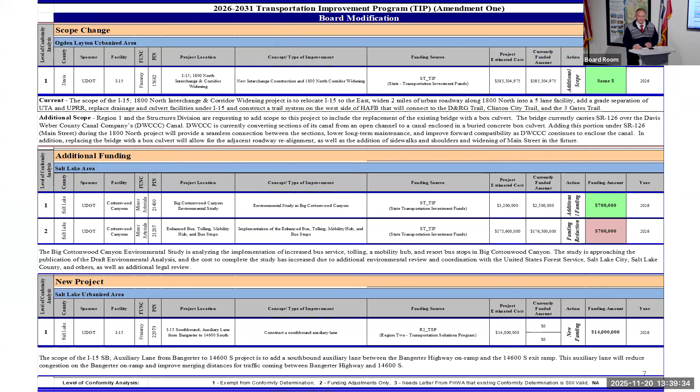This is an information item. Is there any questions on any of this material? There's no questions, Ben. Let's continue moving forward, if you would, please. Perfect, thank you.

So then we have the board mod before you today for your review and approval. There are two tables that identify six projects, and we'll go through those projects fairly quickly.

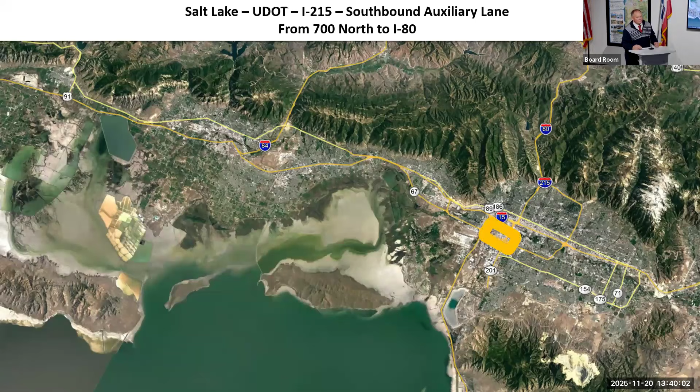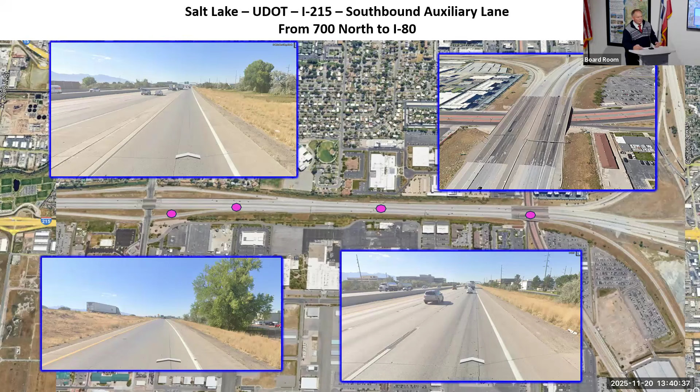The first project on that table is in Salt Lake County, on I-215. It's a request from UDOT to construct a southbound auxiliary lane from 700 North to I-80. Looking at the facility, there's 215, looking from the ramp in the first picture, then onto the main line, and moving along 215 until the ramp that exits west on I-80. The intent with the auxiliary lane is that it reduces conflict points, allowing more time for the merge.

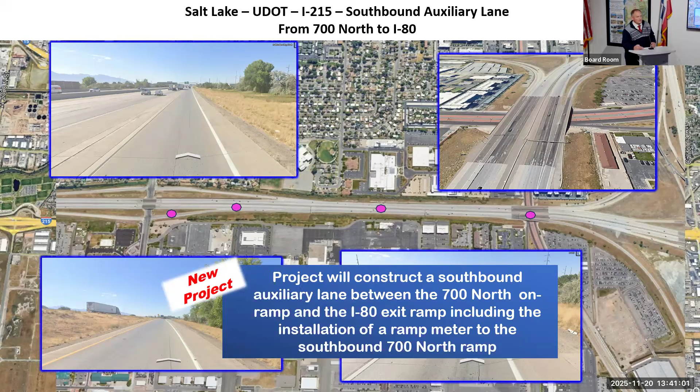There'll also be a ramp meter constructed on the ramp at 700 North. This will enable spacing, or gaps between traveling cars on I-215, to allow vehicles to enter onto I-215 from 700 North. This project is new. It's estimated to cost $9 million, funded with Transportation Solutions Program funds. That's the first project for this board mod.

Hey Ben, can I ask a question on that? It's a blessing for those of us who live in that area with the reconstruction. Will this be done in conjunction with that, or will it follow up afterwards? What do they think the timing is? I'm all for it, it'll improve my arrival at the airport by 5 minutes, so I'm excited.

So we're currently in the process of getting design completed on it. We're working with Federal Highways and looking at the possibility of including it into the existing project that is going on right now. We're still in talks on that. Right now the idea is this would be constructed next year, but we're hopeful we'd be able to do it with the project as it stands now. I don't have a definitive answer yet on that.

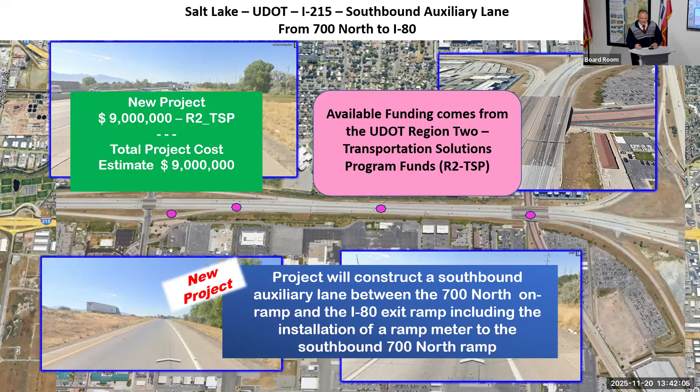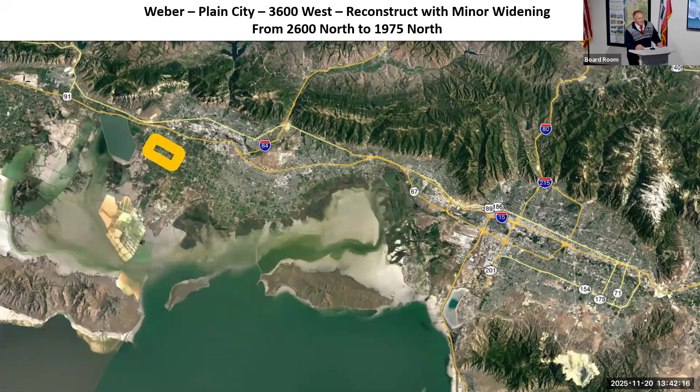Thank you, Kendall. So the next project we have to look at is up in Weber County. This is a request from Plain City, on 3600 West, between 2600 North and 1975 North. The intent is to reconstruct with minor widening, including drainage, curb, gutter, and sidewalks.

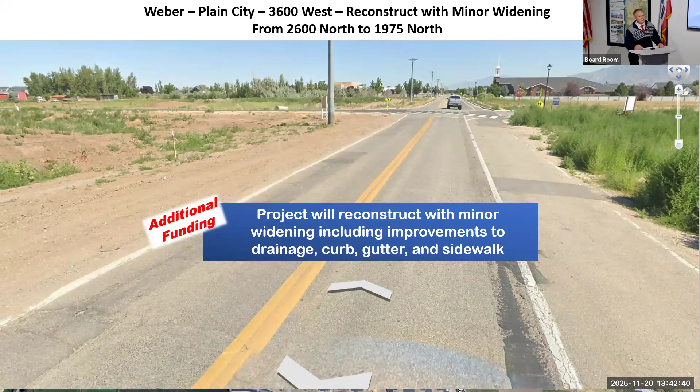This is the facility we reference quite a bit when we talk about the little school child riding along the side or shoulder of the traffic. This is an improved picture since that time. When Transcom reviewed this project and recommended funding to the regional council, it was estimated to cost about $3.1 million plus. The funds requested were $2.9 million.

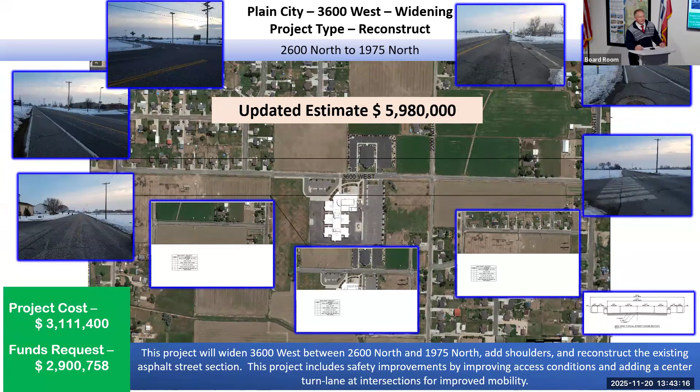Since then, as the project has moved through the design process, the updated estimated project cost is now $5.9+ million. With that increase, the city went to Weber County, because part of the increase was due to right-of-way, and through the WACOG process was able to secure an additional $1.9+ million.

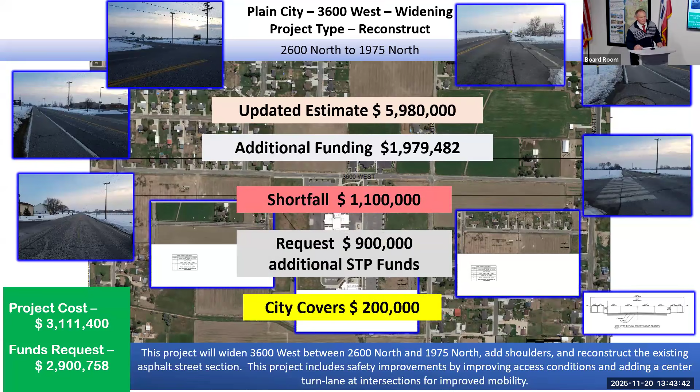That still left us about a $1.1 million shortfall. The request from Plain City is for an additional $900,000 in STP funds, and the city commits to bring the remaining $200,000. This would be the second of the board modifications before you.

The third project is in Davis County, on the West Davis Highway. Can you go back one slide, please? Thank you.

The next project is in Davis County, on the West Davis Highway, or SR 177. Many of you have hopefully had the opportunity to drive on this facility, from where Legacy Highway concludes up to SR 193. The intent of this board modification is to request additional funding for construction of the segment between 193 and 1800 North.

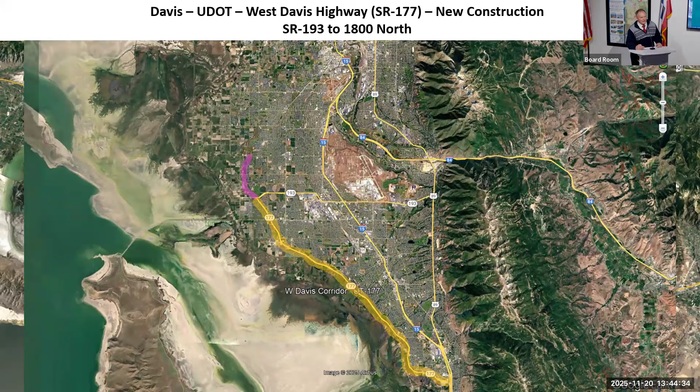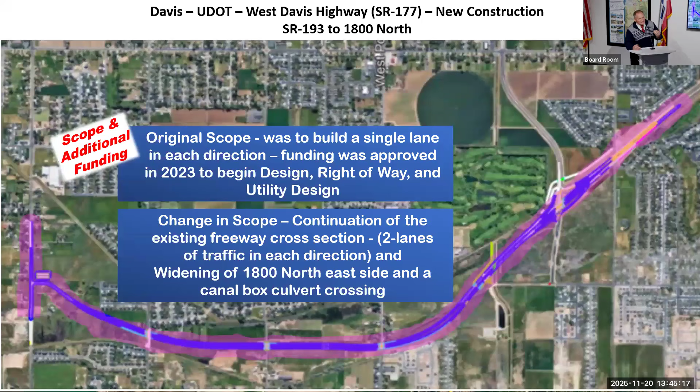Initially this was part of the environmental document done on the West Davis corridor that extended up to 1800 North. This particular section, in the original scope, was to have one lane in each direction. Funding was approved back in 2023 to begin design, right-of-way, and utility design. As the project progressed, additional traffic studies were done, and given the growth and development of the area, it was identified that two additional lanes of traffic were necessary—essentially a four-lane section of road, a consistent cross-section of West Davis all the way up to 1800 North.

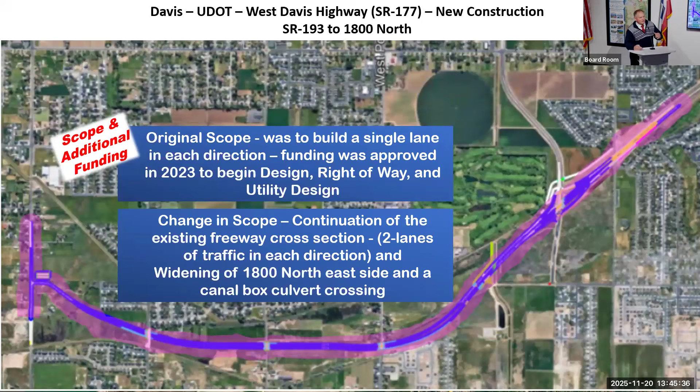This would also include improvements on 1800 North, widening on the east side, as well as a box culvert widening in the area of a future interchange as West Davis moves further north. The request is for an additional $142 million, making the total project cost $261 million.

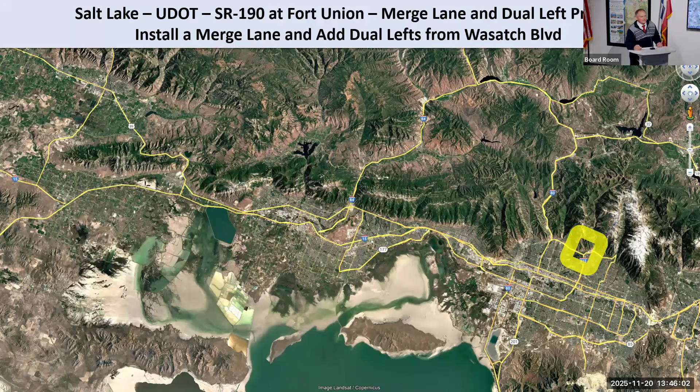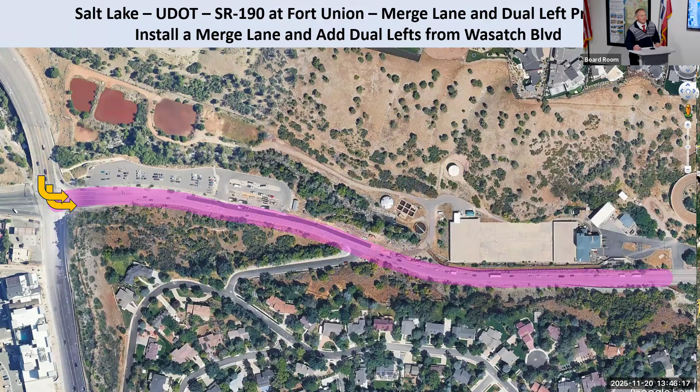That brings us to our second table, which identifies the next three projects. The first is another project in Salt Lake County, on SR 190 at Fort Union. This project was initially to construct a merge lane from Wasatch Boulevard up to the river crossing to the east, as well as adding dual lefts from Wasatch up to the canyon.

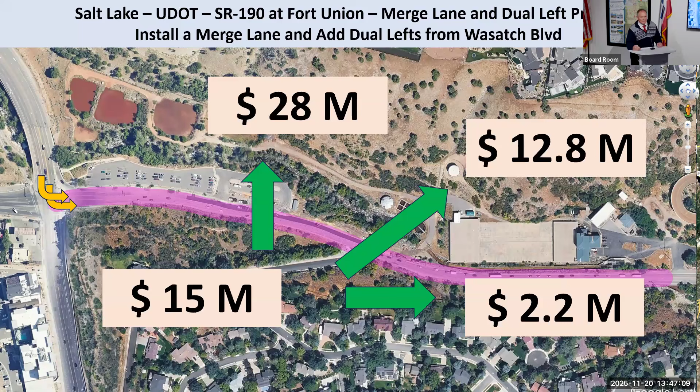As this project was being designed, it was estimated to cost about $15 million. But as the design progressed and data was produced, the project cost increased to $28 million. The operational improvement isn't justified for this amount of cost, so UDOT requests that we abandon this project, taking the $2.2 million necessary to wrap it up. They'll keep the design and data for future Cottonwood Canyon improvements, but return the remaining $12.8 million back to the parent project, the Big Cottonwood Canyon Enhanced Mobility, Increased Bus project.

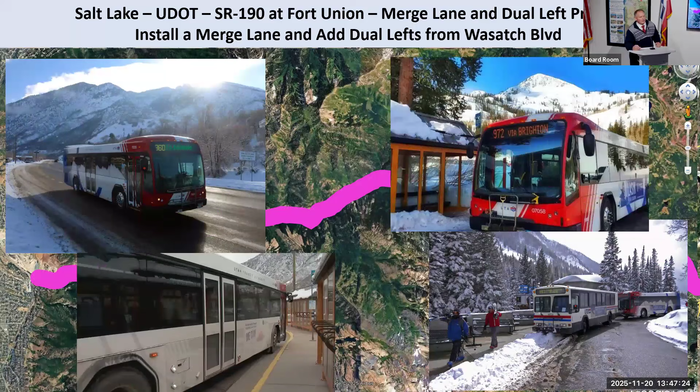Here's the Big Cottonwood Canyon project—you've got increased bus service, bus stop improvements, a mobility hub, and the tolling facility. The idea is to take the $12.8 million, move it back to this project, and close the other project out at $2.2 million.

The next project before us is in Morgan, on I-84. Can I have you back up again? You're showing the only toll road in Utah right there. So is that proposed to be a toll road? Yeah, there'll be tolling facilities up Cottonwood Canyon. Thank you.

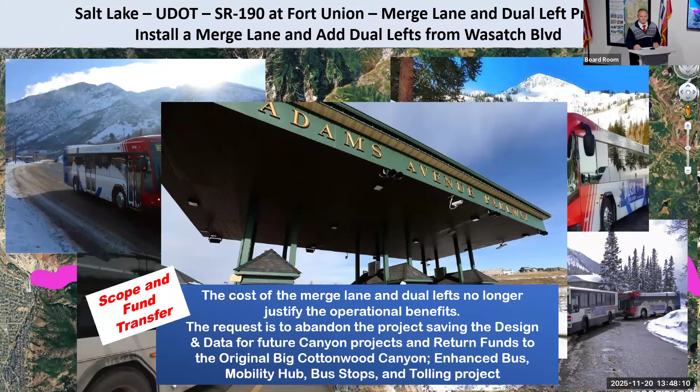I think Mill Creek has tolling as well. What do you think? I did not know that. I took the only picture I could find for the Utah area, but we want to brag about it. It is a good project—I believe it's near some ground the commissioner owns as well, a wonderful area.

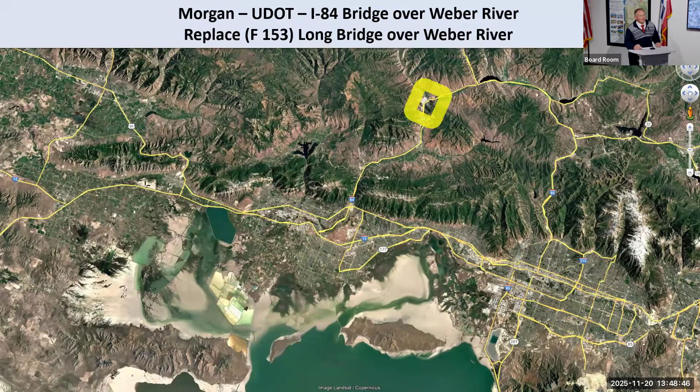They say that's old for a structure. I don't think it's old for people though. So I think it's a facility ahead of its schedule.

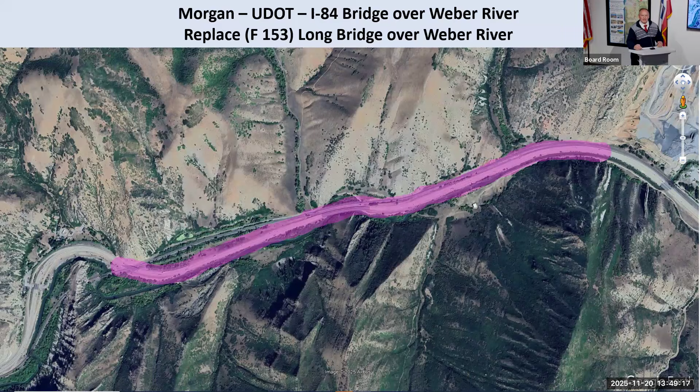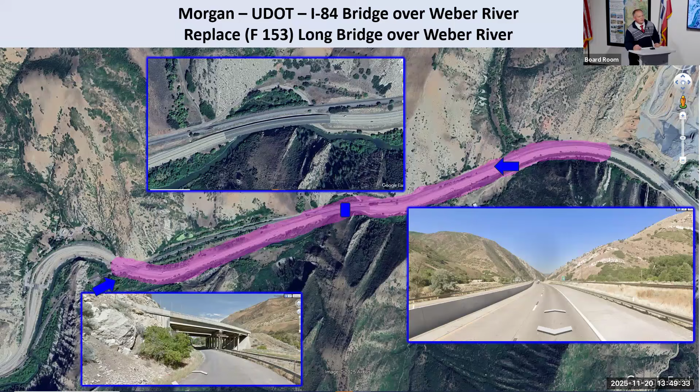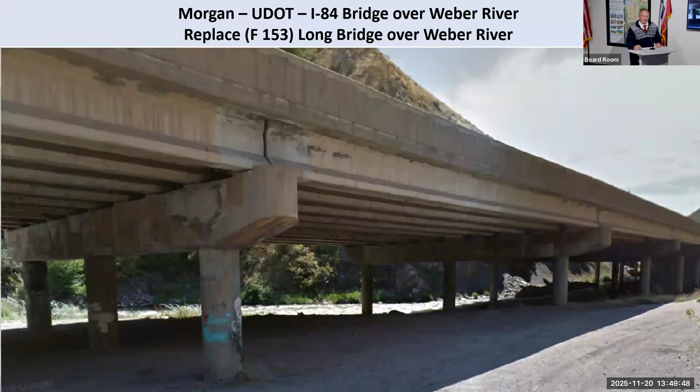But anyway, this road looking here is a picture of the facility looking west. Then you've got a picture of the long bridge section, and another bridge structure that will be addressed in this project. The intent of this project is that it's a new project. This particular structure has had 6 rehabs done to it.

The last rehab was done last year in 2024, but it's necessary to reconstruct this whole facility here. So this is a new project coming to the table, estimated to cost $100 million. Those funds have been programmed, or are available through the state transportation investment funds, to be programmed once approved for a total project cost of $100 million.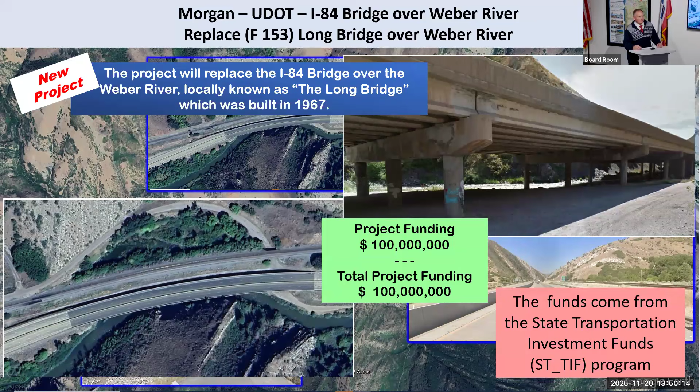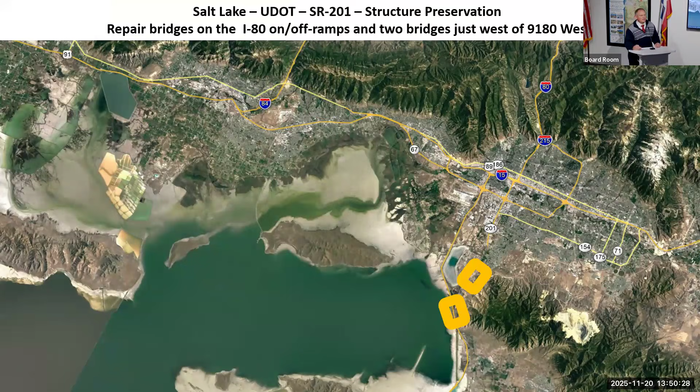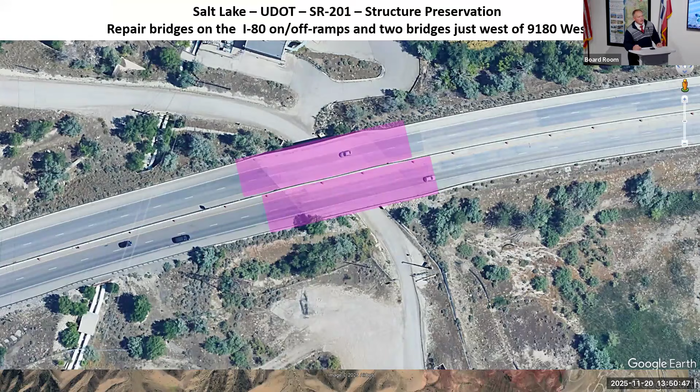The last project before us for this board modification is a project in Salt Lake. This is a UDOT request on SR 201, for structure preservation. This is to repair bridges on I-80, the off and on ramps, and also on 201, just west of 9180 West. The first one here at 9180 West, both of these structures, going both east and westbound, need to have some structural preservation. It'll take care of the potholing as well as seal the structure.

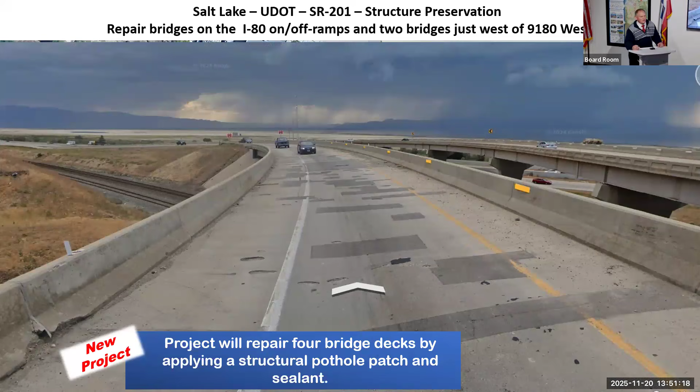And then looking at the structures on 201 onto I-80, both the on-ramp and off-ramp of these structures, it's for the bridge decks, rehabs, the structural pothole patch and seal. This project is estimated to cost $1.3 million and comes from the Statewide Transportation Solutions Program.

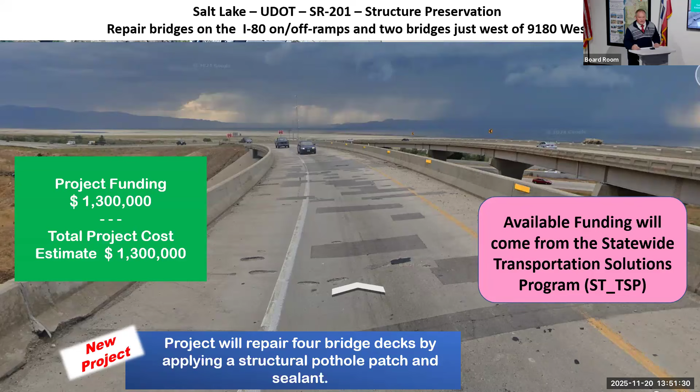Mr. Chair, that's all the projects before us.

Thank you for your report. It's always amazing how much information you've got up there in that cranium of yours. It's awesome. Any of the good stuff comes from my counterparts. Well, you build a great team. Are there any questions for Ben or any of the counterparts he just referred to in either Region 1 or Region 2 of UDOT?

Hearing no questions, any online? Hearing no questions, I'm looking for a motion to approve the resolution to modify the 2026 through 2031 Transportation Improvement Program as requested.

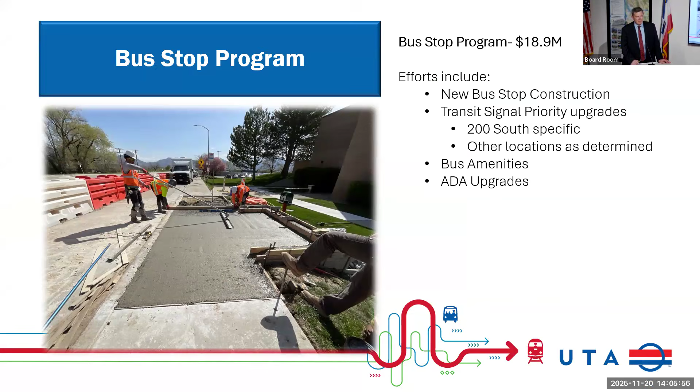We're also currently underway with construction of a training facility, both for bus and rail, as well as for maintaining those systems, and that's in South Salt Lake. Again, we're looking to improve our bus stops. Many don't meet ADA requirements, and we're working with a number of communities to address those—we welcome partnerships where you see opportunities for us. We find that as we improve bus stops, ridership increases at those locations.

The Frontrunner 2X project is currently underway, led by UDOT. That will come with 10 new train sets as part of it in order to get to 15-minute headways. But our existing commuter rail trains will still need to be overhauled—we'll need both sets in order to do that. I mentioned we're replacing 40 light rail vehicles, and we still need to overhaul the existing ones; systems on there need to be replaced. This is outlined in our 5-year plan, with a breakdown of the types of propulsion modes we're looking for in our bus fleet as well as our paratransit vehicles.

We're working to get our paratransit vehicles so they're near level boarding. Right now an individual is lifted up quite high on a lift in order to board. So we're going with a different type of vehicle that puts it lower to the ground, which will be a lot better for the patron as well as our operators who are loading and unloading individuals that need that help.

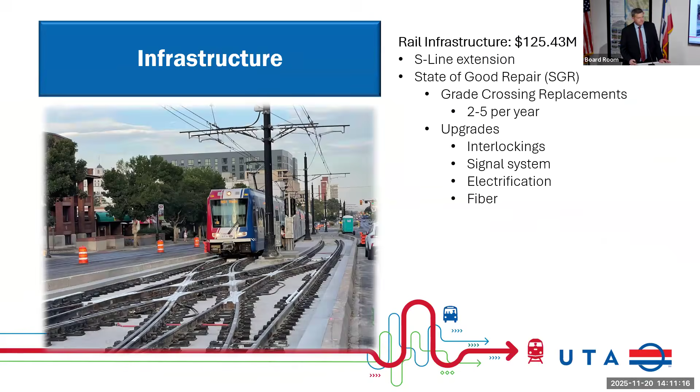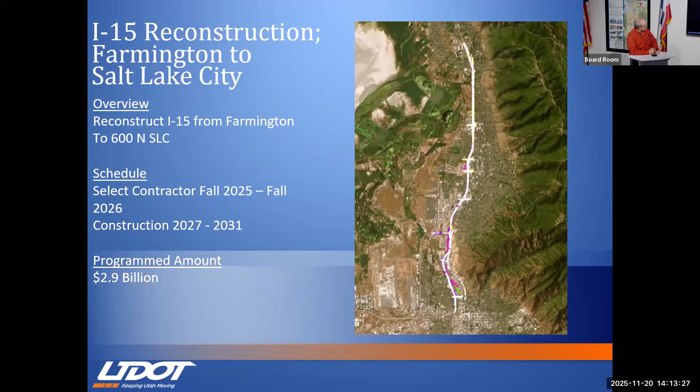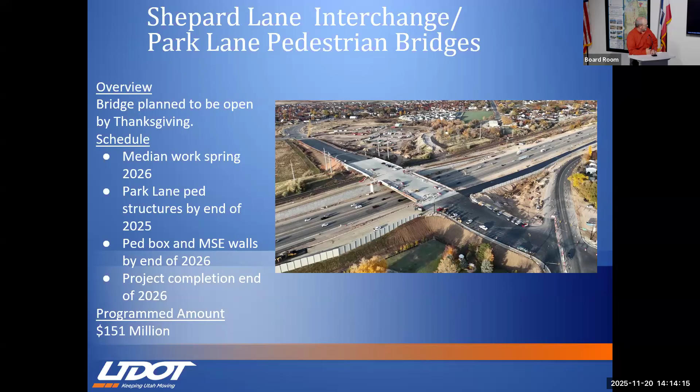We've got a project that's about halfway done up at Park Lane or Shepard Lane, just north of Park Lane by Lagoon and Farmington, putting in a new interchange. The east-west route should be opening up next week before Thanksgiving. We're also adding about 4 bridges to accommodate pedestrians across east-west, across the tracks, I-15 and 89, as well as a box culvert underneath Park Lane. We expect that facility to be open in the summer next year. They'll be closing down Park Lane for a time to get that underpass in place, but the whole project will be done by the end of next year.

One project that's about halfway done, wrapping up, is 5600 South. This is the north end of Hill Air Force Base. The I-15 portion will be wrapping up this year, and then they'll finish up the corridor going west next year.

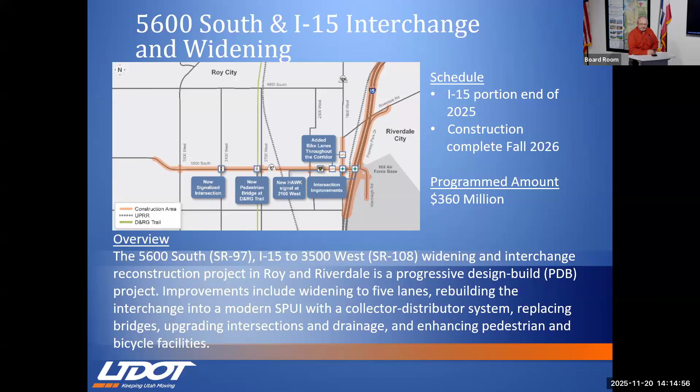Just south of it, we've been blaming all the... Can you just jump back a sec? Is that the project, the preceding one? When you're going on I-15 and on the east side of the freeway, there's sort of the massive buildup, that's the next landfill. That's the next one? Yeah, okay, then keep going. Thank you. So, this one.

I was the project manager for this one for a while, so we just blamed everything on 5600 South. You didn't know the difference. So if there were any traffic problems, it was their project. I can say 5600 South is wrapping up the I-15 portion. Ours started this year.

I-15 is getting moved about 800 feet to the east to get some separation from 126 Main Street there, so our operation of the interchange can function much better. They moved several hundred thousand, over 300,000 yards of material in about 3 months at the beginning. It's kind of fun, they had the big earth movers running almost around the clock.

They are paving it already. They've put asphalt down and concrete on top, and that concrete will actually be wrapped up here in the next week or two. I need to stop by on the way back because they're swinging girders on this new interchange. This is a really weird thing, we're not used to swinging girders for the bridges without traffic, so it might be a little too simple.

This I-15 portion will be completed by the end of next year. In fact, in the spring, northbound traffic will be moved over onto it. And then the 1800 North corridor that goes all the way down to 2000 West in Clinton will be completed the year after, into '27.

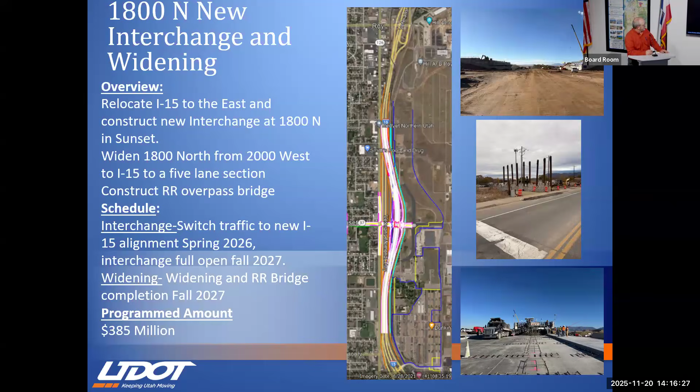Talking about Clinton, we just wrapped up a section of 108, 2000 West project there. We'll be advertising at the end of next year the next phase going north, which takes you up into the West Haven section, up to the section that's already concrete we did about 7-8 years ago.

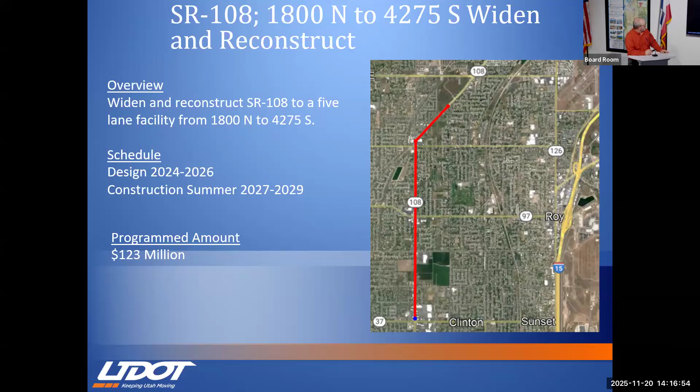We have the 24th Street interchange. We're working on designing that and purchasing right of way. In the bottom left-hand corner there, the train tracks run across at a diagonal across that intersection. We're in the process of getting that relocated and off the highway. They're working on the design there and hoping in a couple of years to get that out to construction.

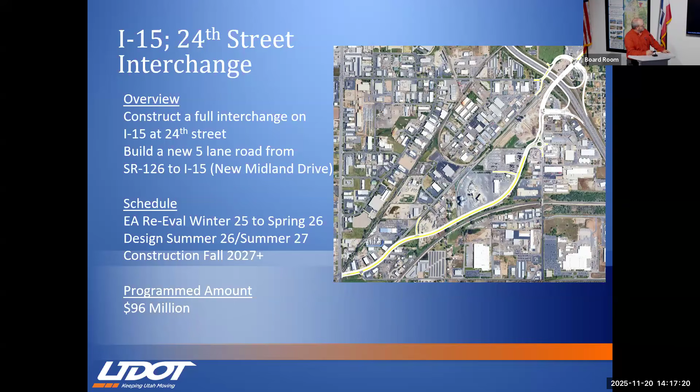Here's a project that we started this year as well, this is part of my commute. I live up in Cache Valley. This is just north, at the very bottom of the screen is Smith and Edwards, the county line. Take 89 and go up there a few miles. They're reconstructing the pavement, improving the drainage, and adding some shoulders which don't exist up there right now. That project will be done the end of next year.

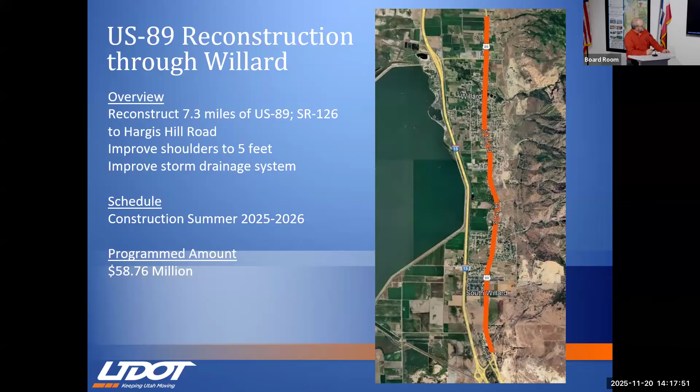Can I just ask a quick question? Wasn't there also some type of trail system in that? Is that already done or is that in the next phase? Just couldn't remember. All the above.

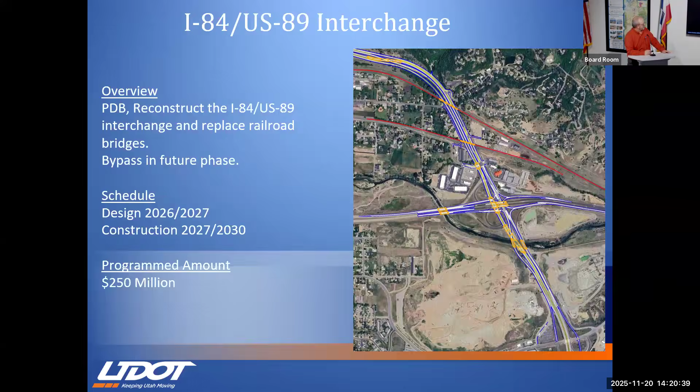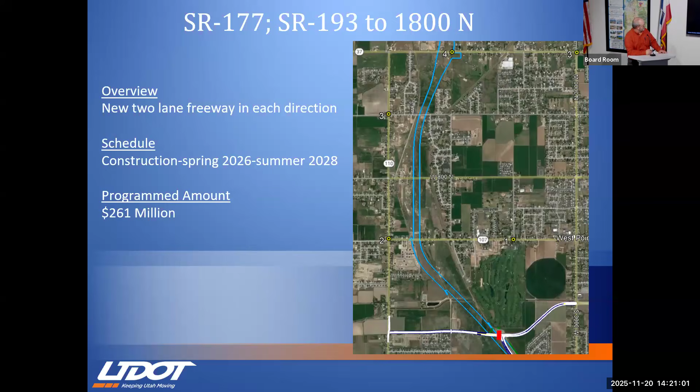And just north of there, we're continuing the next phase. They're doing the environmental document from 1800 North to 4,000 South. In fact, after this meeting, I'm going to stop by a public open house meeting. We're doing the environmental document on that right now, anticipating to have it done in the next year.

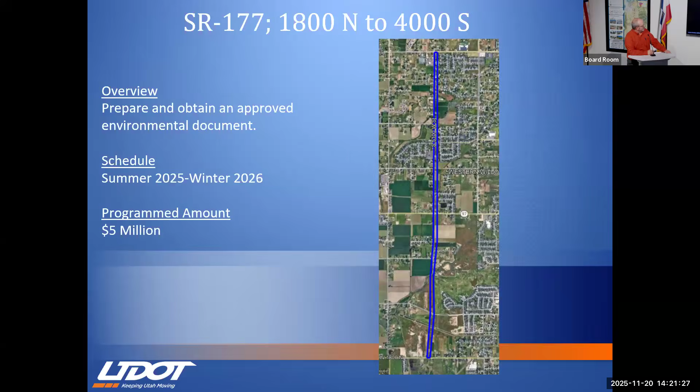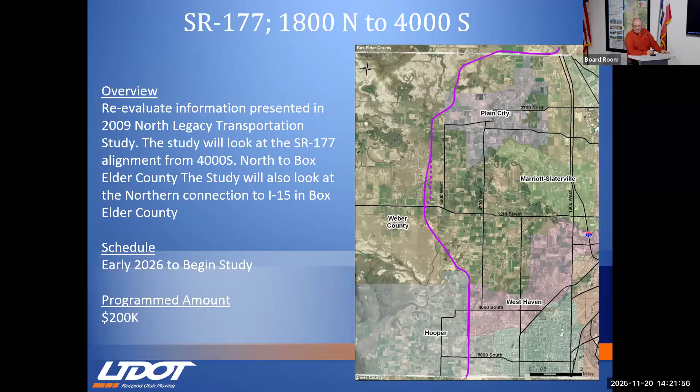We'll continue 177, the next phase, from 4,000 South all the way up to Smith and Edwards, the county line, up there by Willard Bay. We're doing a corridor study - last time we did that was 2009, so we're looking to update that. One of the great things about these corridor studies, environmental studies, or any of our planning is the opportunity to do corridor preservation. We've purchased some properties along this whole corridor, so that is a great savings for the taxpayers.

Along with that I-15 project, we are widening SR 67, Legacy, adding that third lane. They're anticipating sending that out to bid in a couple of months, and that'll be constructed next summer, prior to the I-15 project being started. Well, that's all I have.

Any questions? So does that mean the I-15 corridor and the Legacy are both going to be under construction at the same time? No, that's why we're advertising this separately - it'll start next year and be finished next year. The I-15 piece, construction won't start on that till a year later. We're having that built first so we can transfer some of that traffic over to it.

Just to echo that, UDOT evaluated the traffic on north-south and made a smart determination that by advancing this Legacy Parkway project ahead of the I-15 construction, they're able to divert some of the traffic from I-15 to Legacy. That'll actually save significant amounts of money on the I-15 north project, enabling them to do it for less cost, less time, and more worker safety - a complementary effort. Joe, I think it was 200 million they could save by doing it that way. Yeah, that's what Carlos said. I just saw they were both in 2026, but the other one will be in the fall.

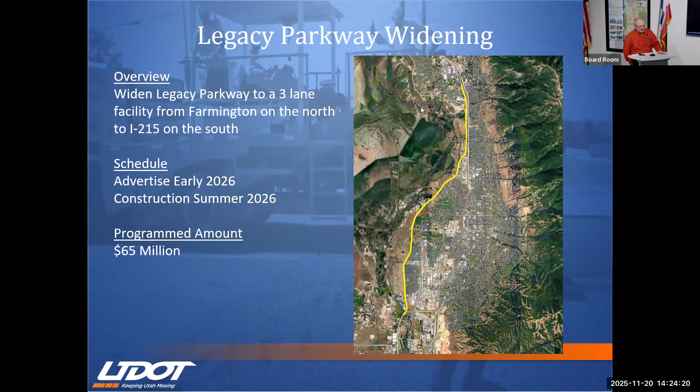Kendall Draney. All right, we'll see.

Thank you. So I am Kendall Draney, I'm the Region 2 Program Manager. Like Paul said, I'm representing Region 2. Our area that we oversee is Tooele County, Salt Lake County, and Summit County, just to give you an idea of the projects we're going to be talking about today.

Along with that, we've started a trail, this is the starting point of a trail that goes along Bangerter Highway. The next phase of Bangerter Highway to the north will connect into the same trail and continue going north. So we built the initial parts of the trail with this 4700 South project.

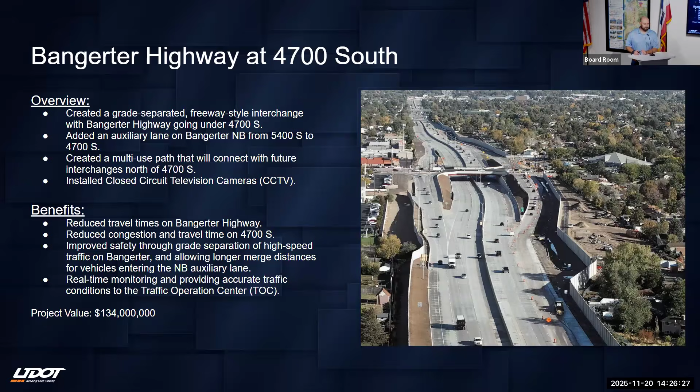The next one is Bangerter Highway South interchanges, very similar to what you just saw on 47th. These were at 9800 South, 13400 South, and 2700 West. The 98th and 134th went down and underneath the road, so Bangerter Highway is going underneath. On 27th, Bangerter goes up and over 2700 West.

Again, the benefits to these projects are being able to separate that high-speed facility from those crossings, and to give more time to the crossings, specifically at 134th South, where that's truly needed with the amount of traffic going out to Herriman, Bluffdale, and Riverton in those sections.

The project value for this one was $268 million, and again, this is at the same stage as the other ones, at the punch list. We're just going across the final construction phase with this. All traffic's open and all the movements right now.

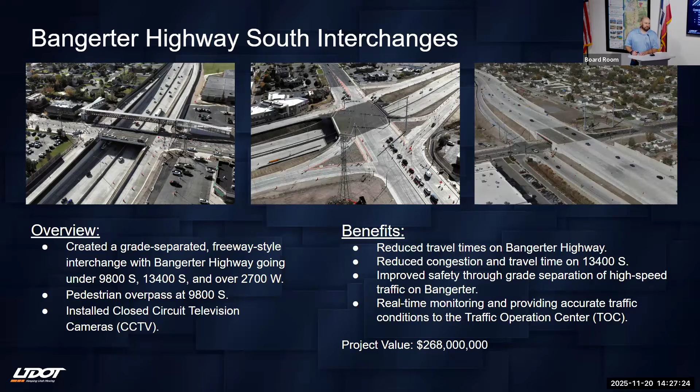I'll highlight some of the other current capacity projects we're working on at the region. I'm not going to have a specific slide for each, I'll just go down talking about them. We talked about the two Bangerter projects. We also have a capacity project going out in Tooele County, coming into the valley.

This is out on I-80, adding an auxiliary lane from exit 99, those using 36 driving from Tooele County. That's adding that extra lane to be able to go to 201 and exit onto 201, as well as adding a northbound lane on 36 in Stansbury all the way up to Lake Point. That project is anticipated to be completed next summer, and it's a $38.4 million project.

And then we have our SR 111, Herriman Parkway to 118th South. This is a new facility out on the west side of the valley.

This is realigning 111 from the South Jordan section going straight towards the Riverton and Herriman direction, all the way down to about 1260 South, where it curves back in. There'll be a section built by the city from 1260 South connecting into this, where 1260 currently dead ends. That project just bid out, construction is supposed to start next year and will run until 2027. It was a $50 million project.

We have in design right now our Bangerter, the next sections of Bangerter, to the north, from 4100 South all the way to Parkway Boulevard. The project value here is $1 billion. The anticipated beginning of construction is in 2027. This would be doing the same thing as the other Bangerter sections, grade separating those intersections that it goes over the top of.

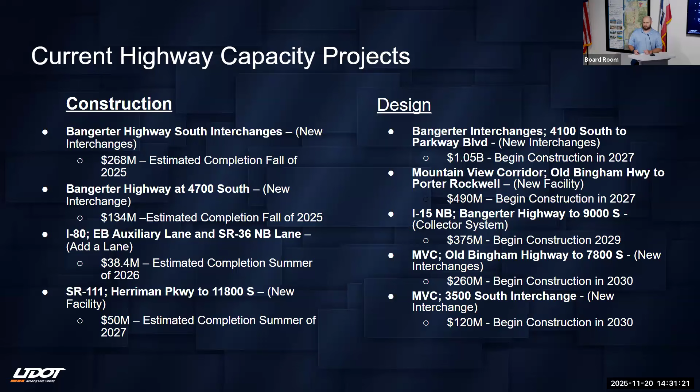Kendall, just explain for everybody, what is an auxiliary lane, please?

So an auxiliary lane isn't necessarily a capacity addition. What it is, when that on-ramp comes on, instead of having to merge directly over immediately into the through lane, you extend a lane that goes to the next exit. That allows distance for cars to make decisions and not have to jam over immediately, and those wanting to take the exit have more time to get into it. So it allows the weaving in those conflict zones to be more fluid and safer for those driving in those sections. It allows the flow to continue with less impediments and enhances safety.

I also want to highlight some of the transit and active transportation projects we're doing in the region. The first one is FrontRunner 2X. You've heard a little bit about this. This is going to do double tracking in 11 locations, create a new station in Bluffdale, and look to build a new maintenance facility. Some of the things it will do: increase the frequency of FrontRunner to 15 minutes during peak, 30 minutes off peak, increase capacity to have 53% more ridership ability, and also improve reliability of the trains.

This project is currently funded with TTIF money as well as some other local and UTA funding, and they're going after a grant from FTA for the remaining dollars. The total project value right now is estimated at $3.2 billion, with $845 million of our local agencies' funding in the project. Right now, the anticipated completion date is 2030.

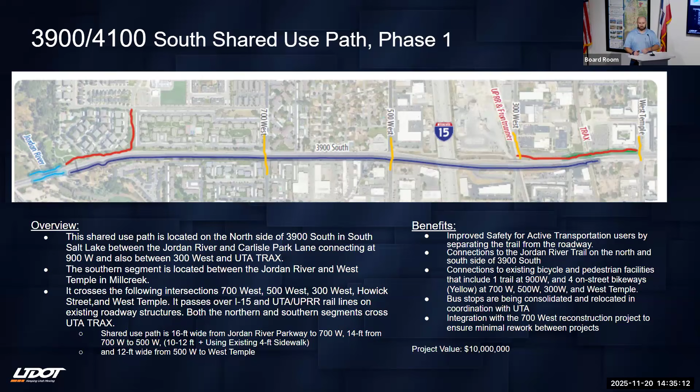For active transportation, we have our Utah Trails Network. We talked about 3900 South. We also have the Welby Jacobs Canal Trail out in Riverton, by the Mountain View Village development, doing a pedestrian crossing there along the Welby Jacobs Canal. And then we have another Utah Trail Network project, the Bingham Creek Trail, from the regional park in South Jordan that goes through West Jordan down to the Jordan River. We also have a bike facility on Emigration Canyon.

We also have a pedestrian structure going across SR 209, 90th South, down in Sandy at Quarry Bend, that will be able to get pedestrians across. So we're trying to make these connections, and that's what we want to highlight here: UDOT's not just doing capacity on roadway, but we're trying to make sure we're helping transit and active transportation as well.

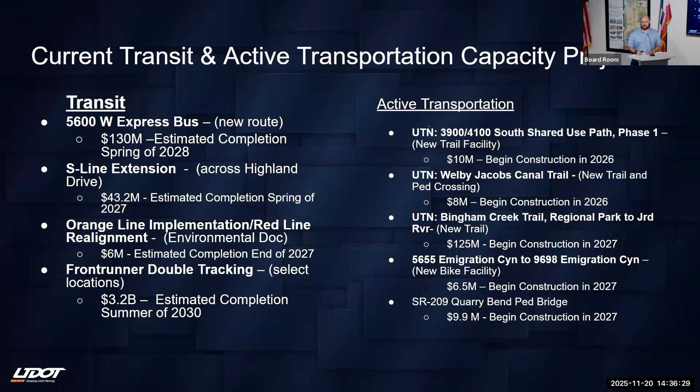Any questions for myself? Questions for Mr. Drainey? Andrew? No, I don't have a question, Mr. Chair, but just two things to note. One, Carlton has a question.

Okay, thank you. No, it's really just a compliment to UDOT. They've worked great with us on a lot of these projects, and our teams are working really closely together. Just kudos to the efforts they're making.

I'm going to just piggyback on that too. I've never in my lifetime been able to continually move on roadways or traffic the way that we are today. No matter where you go, I'm impressed. Maybe it's the learning factor we all get from coming to these meetings, but to realize what goes into moving traffic while construction's going on right over here, or there's a box culvert being installed, or a swinging bridge being installed, or whatever that might be — it's incredible.

The fact is, I've been sitting here thinking the money's already there for active transportation. I look forward to the day, and I hope it's in my lifetime, that we have to say we need more money for active transportation, because there's a lot of money in there and I'd love to see it continue to grow, because as we grow active transportation, it helps public transportation by directly impacting the first and last mile. Great job, both of you.